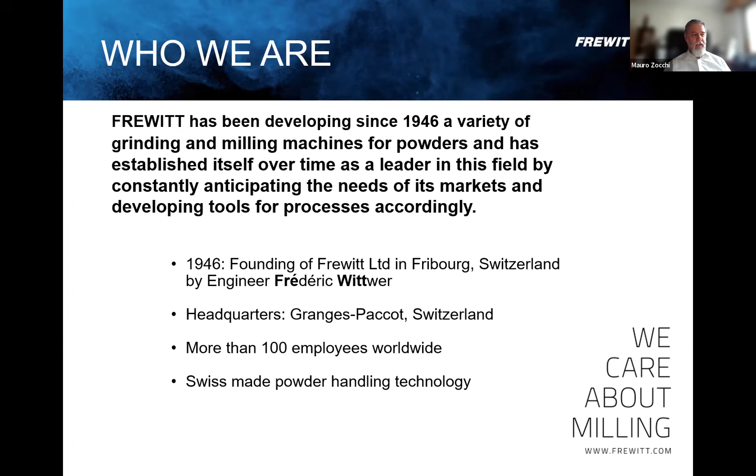We are located in Switzerland in the central part, in a bilingual zone where French and German is spoken. Maybe you are more familiar with Geneva and Zurich, talking about Switzerland. We have Zurich in the east, Geneva in the west, and Basel in the north. We are in the middle. I'm coming from the south, from the Italian part of Switzerland, and we are quite a multicultural little company.

We have core values, Frewitt Total Care: mainly protecting the staff of our customers, protecting the environment of everyone, protecting your products, your APIs, and protecting your investment. These are the main core values that we keep in mind while developing our machines for the market.

And I would just want to go through a quick summary of what we have been doing. In '46 was the foundation of the company, starting with oscillating mills. The engineer Wittwer was one of the main pioneers with this milling process, oscillating mills, to which we added already 50 years ago the hammer mills, then developing the cylindrical sieve mills, going to the conical mills in the 90s. End of the 90s, we came out with pressure shock resistant hammer mills, so 10 bar resistance units.

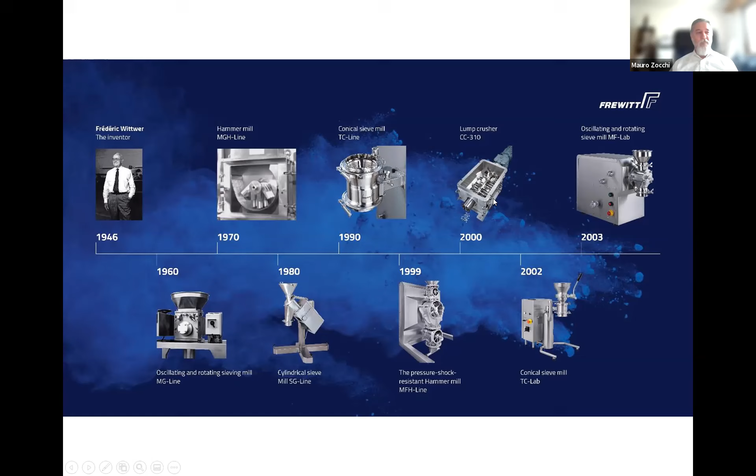We further developed crushers, then laboratory mills, other crushers, some other laboratory mills, to come in 2009 with a very nice development of 2 milling processes combined together, crushing and milling, mainly to give a solution to an existing problem of products solidifying in big blocks, metformin being a good example. So we developed this machine enabling you to throw in the big blocks and go in one go to micronized, free flowing powder. Cylindrical sieve mills of new design, new generation of oscillating mills.

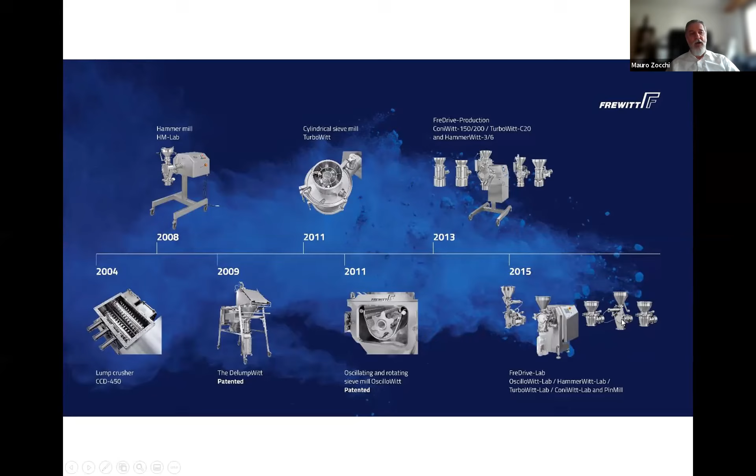And then 10 years ago, we came out with the FreDrive-Production and FreDrive-Lab, 2 platforms on which we can interchange several milling processes, up to 6 with the lab machine.

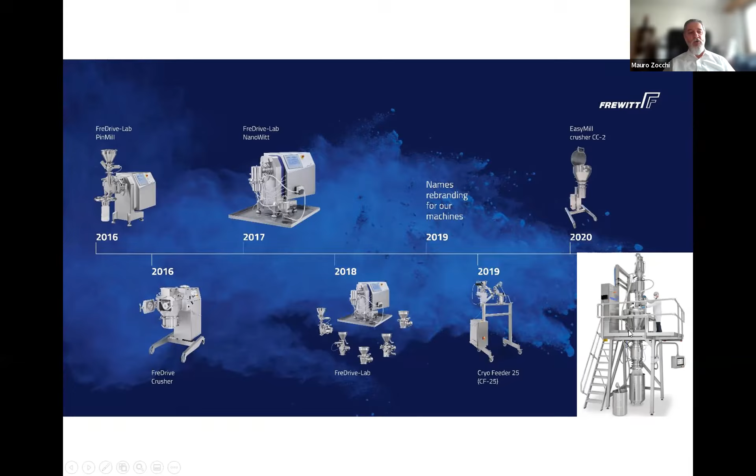A few words just to fine tune. We call fine milling all that goes down to a D90 of less than 100 microns, let's say, for which typically we use hammer mills for dry powders. By D90, we mean that 90% of the milled powder is below this target of, in this case, 100 microns.

Pin mills can go much lower than 100 microns, as well as jet mills. They can reach D90s between 5 and 30 microns, that we call really the core of micronization. There are several interpretations of micronization, so we cannot be so precise, but every company looks at micronization in a different way.

But on average, when we are going from a D90 of 5 microns to a D90 of 30 microns, it is generally called micronization. Then we can go lower down to nano size, but this is utilizing typically bead mills, which is a wet liquid process. Today, we'd like to concentrate on micronization.

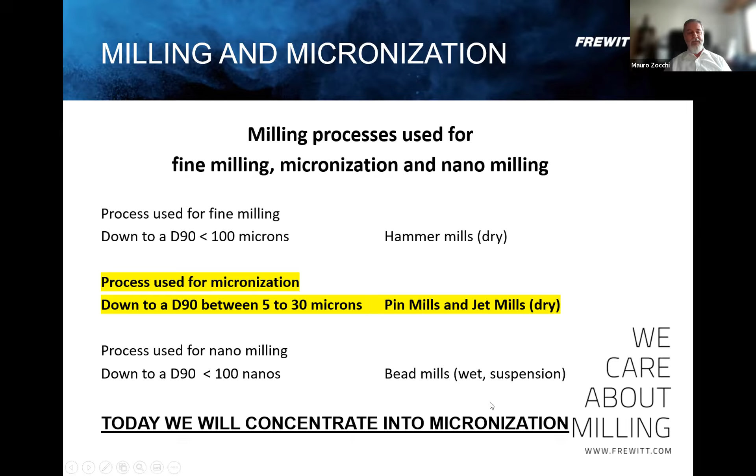Yes, 1 second. Okay.

This is a simple photo giving you a little bit the idea of how a pin mill looks. There is the chamber with a door. The door has typically a stator with the pins, while inside the milling chamber there is a drive, and the dynamic part, the rotor with the pins. The product typically enters here, gets micronized here, and then exits at the bottom of the mill.

There are different designs on the market. I just chose one to give you more or less an idea of how the micronization takes place. The concept is an impact mill. It's not so different than a hammer mill, but it works with the pins: in this case there are 3 lines of pins, and here are 2 lines which are put in between, with a small gap in between, and there is a high speed which is typically higher than hammer mills.

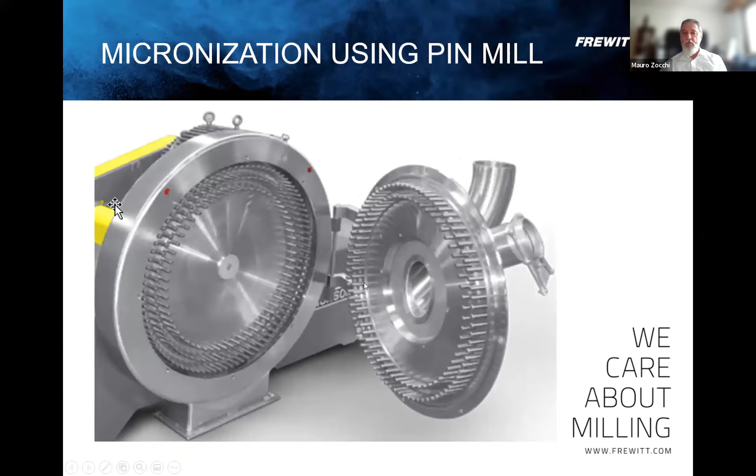I hope the explanation is sufficient on how the pin mill works. If I'm not clear enough, please ask if you have any question about that. I proceed with the...

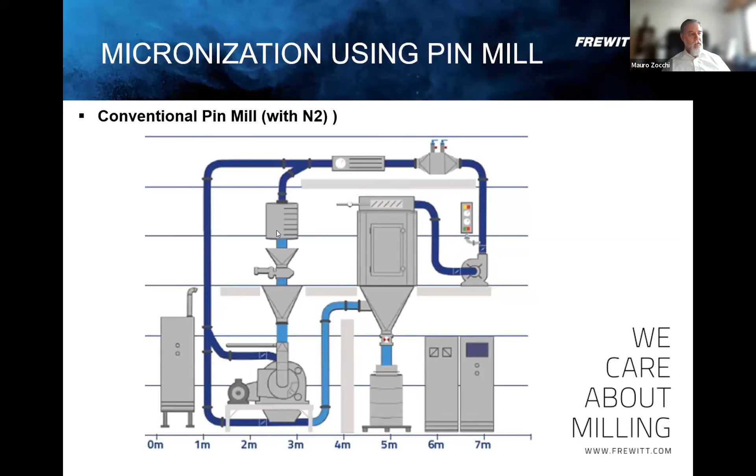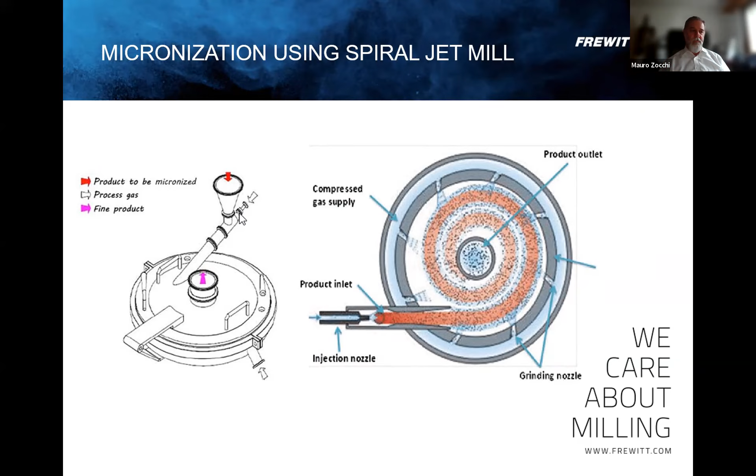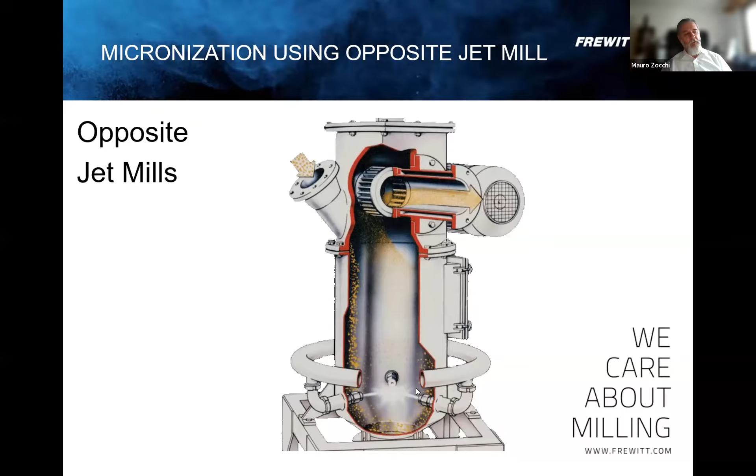And here on top, we have a classifier wheel. That's a mechanical component of this mill, which we don't have in the spiral jet mill. And depending on the speed that we use for the wheel, for this classifier, the powder either goes through when it's fine enough or comes back to be further micronized when it's not fine enough.

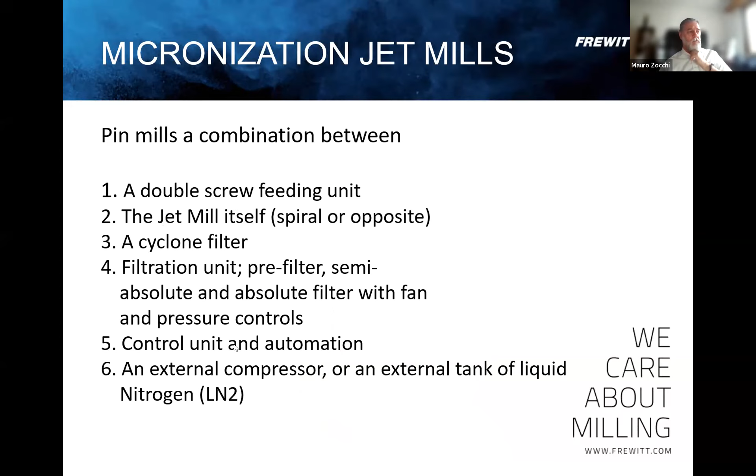Again, as for the pin mills, we have a double screw feeding unit, the jet mill itself, which can be spiral or opposed, cyclone filter, final filtration unit, the controls unit and automation, and for sure an external compressor or an external tank of liquid nitrogen, right? So these are the 2 or 3 main processes that we are utilizing for micronization.

And now we are coming out with a new pin mill, which is the one I'm presenting today. And you might ask yourself, why a new pin mill? Because there are already pin mills on the market, right? The idea was to take a look at the main challenges with which the end user is confronted, and develop a pin mill that solves these challenges. So it solves the problems that are daily presented to the end user, and helps them have a much better mill. So it's not just a new pin mill, we wanted to do something very special.

So these are the main challenges with which the end user is confronted. Of course, he needs to get to a certain particle size distribution. He needs to avoid heating of the product. Heating of the product is a constant challenge using pin mills and spiral jet mills. Throughput as well, it needs to have enough productivity. Explosion risk and costly countermeasures. The finer you go with micronization, with milling, the more explosive the powders are, the higher the explosion danger. So this is quite a big issue in micronization.

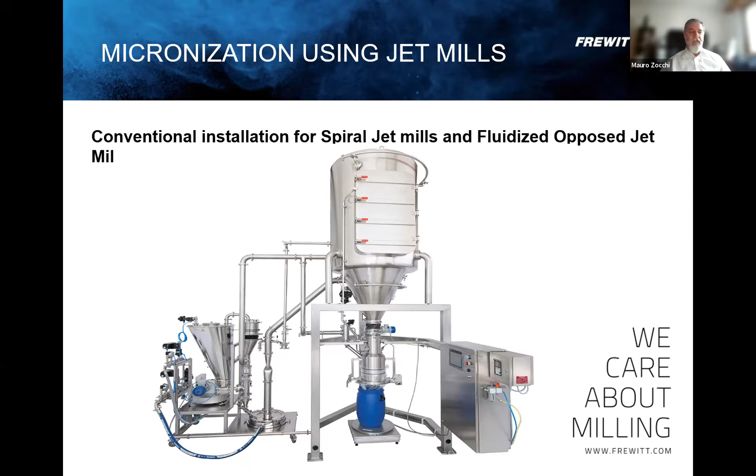Product retention is another problem, and difficult cleaning as well. This is mainly due to the large contact surfaces and large filtering units that are used. The installation footprint as well. You see that the mill is only a tiny part of the whole thing, but then you have a dosing unit, which is not huge for sure, but especially the gas management part, the cyclone filter, where you need to separate the solid from the gas. This is quite important. So this is a large installation for gas management.

Another quite big issue is the operation cost, especially with nitrogen. Nitrogen is used to avoid explosion and also to protect the product, and these are huge amounts of nitrogen, which are quite costly. Another challenge is the noise, because the jets are very noisy, and pin mills as well, running very fast. They are very noisy, up to 120 decibels.

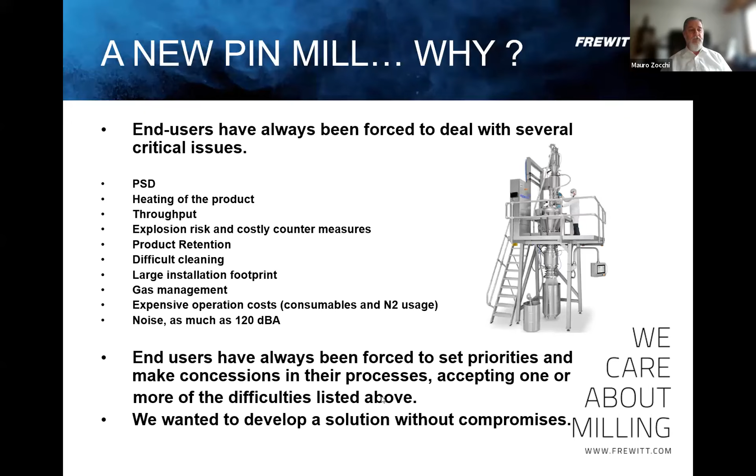So this is what the end user has always been confronted with, and we wanted to develop a solution without these problems, without these compromises. I would like to show you a video now that anticipates a little bit what we have done with this new pin mill.

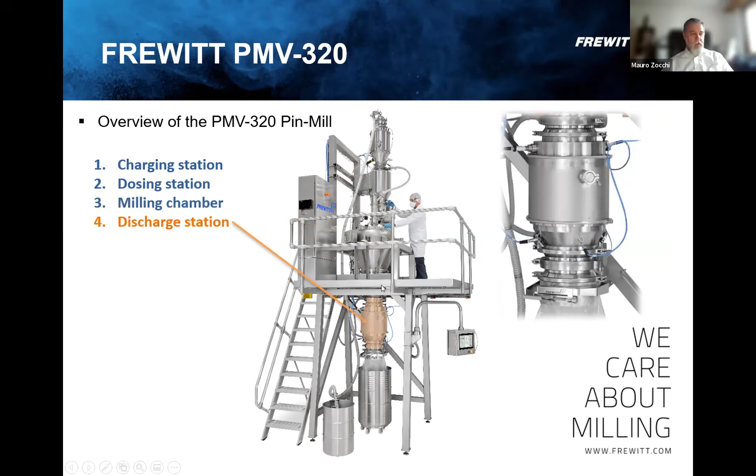PMV 320 stands for pin mill and vacuum, because this machine works under vacuum, and 320 is the size of, let's say, the nominal diameter of the milling chamber. Okay, here we see an overview of the entire installation. We have on top a charging station. We have a dosing station, and we have a milling chamber. Thereafter, we have a discharge station.

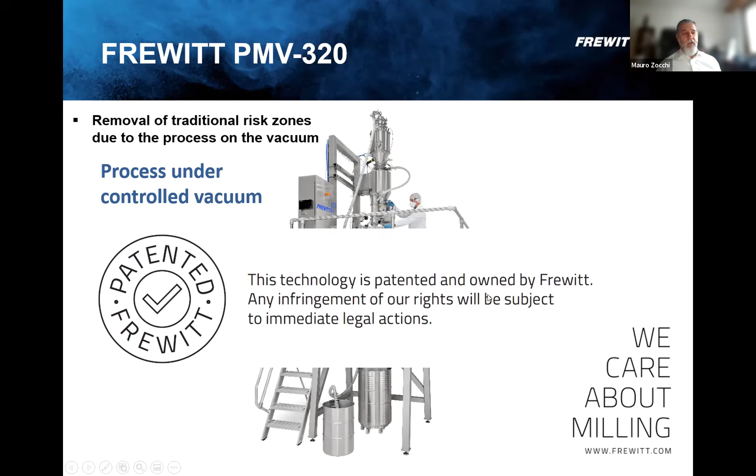The process under controlled vacuum is patented. We received the patent for Europe and United States, and we're waiting for more patents. Not only has the patent for this pin mill under vacuum been received, but also the patent for other mills in our range. Milling under vacuum in general.

We can see here that the whole installation is under vacuum. We have in the vacuum the charging, the dosing, the milling chamber, and the discharge station, which leads to one of the main advantages in this case: the zero risk of explosion. So for explosive products, we do not need any longer to deal with inertization of nitrogen. We do not need to deal any longer with 10 bar resistance, explosion-proof machines, which are very, very solid and heavy, and which are not really what we are looking for, especially in pharmaceutical application, when we need lighter units, also easy to assemble, disassemble, and clean.

Working under vacuum, we also have, I would not say, the noise level of 69 decibel. It's almost not noise. It's a silent level, right? 69 decibel. It's much less than now that I'm speaking. Speaking now, I'm at least on the 70, on the 80 decibel. So the machine is really so silent that, just to make an example, when this machine was presented for the first time, we were a group of persons in the milling chamber, and after 10 minutes we were looking at each other and said, when do we start milling? And they told us no, the machine was already running for the past 10 minutes. It's a very silent system.

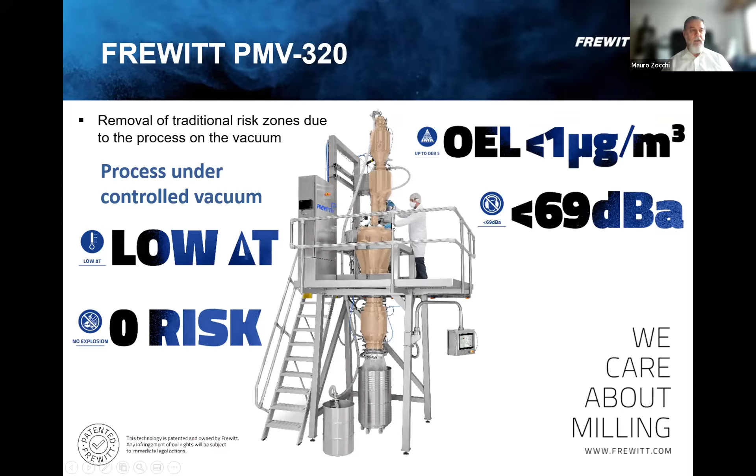At the same time, we are at the high containment level, which is less than 1 microgram per cubic meter. We are in full band OEB 5 because everything is sucked. There is no air inside. We are under vacuum. There is no chance at all for any part per million of particle to go outside of the machine. It's like being in an isolator. In fact, the first step before starting the production is a tightness test of the installation. It's an integrity test. Only after having passed this first step, we can start utilizing the machine.

The machine works under vacuum, which means it works at around 100 millibar. Let's say, imagine we have an explosion. Even if the explosion is not possible, would we have an explosion in any case for some exotic reason, being in 100 millibar and having an explosion which typically increases the pressure tenfold, we go from 100 millibar to 1 bar, which is atmospheric pressure. So there is nothing that can endanger the product and nothing that can endanger the machine.

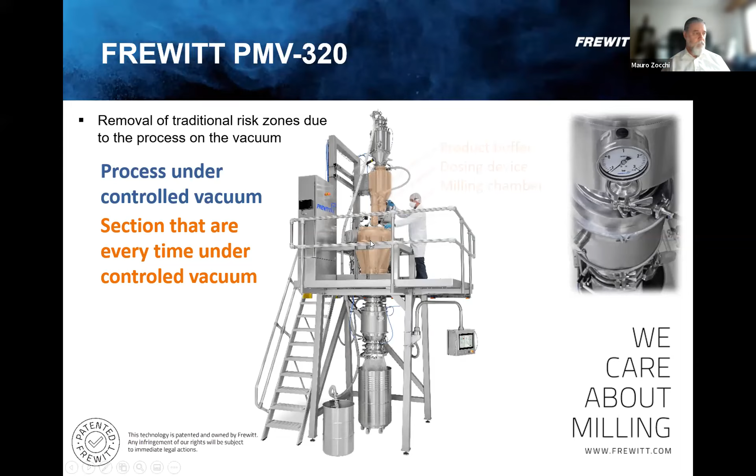So here we have the sections which are always under controlled vacuum, with no exception. This is the buffer, the dosing unit, and the milling chamber. Product buffer, dosing device, and milling chamber. And then we have the section that changes from vacuum to atmospheric pressure. The charging station is one of them, which means that we have the filling of this container with the vacuum conveyor bringing up the powder. And once the powder is ready to be discharged, we go into vacuum mode utilizing some special valves.

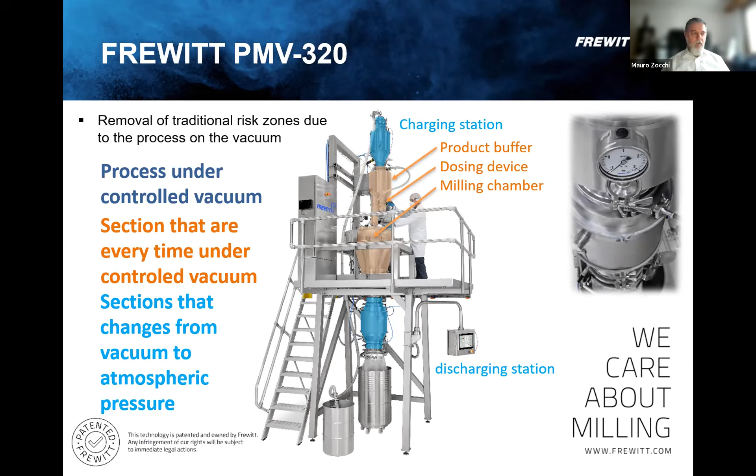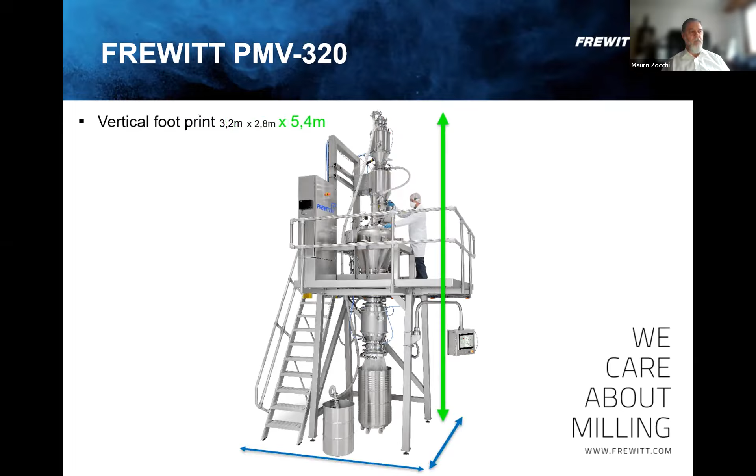The same for the discharge station. When we have enough product to be discharged, then we change from under vacuum to atmospheric pressure, so that the product can easily fall by gravity into the receiving container. We have a vertical footprint. We have a width of 3.2 meters, a depth of 2.8, and a height of 5.4 meters. Here we can see some more details.

The control of this installation comes with an industrial PC, with a touch screen controlling the machine. The control cabinet can be placed under the machine on the catwalk or in the technical room.

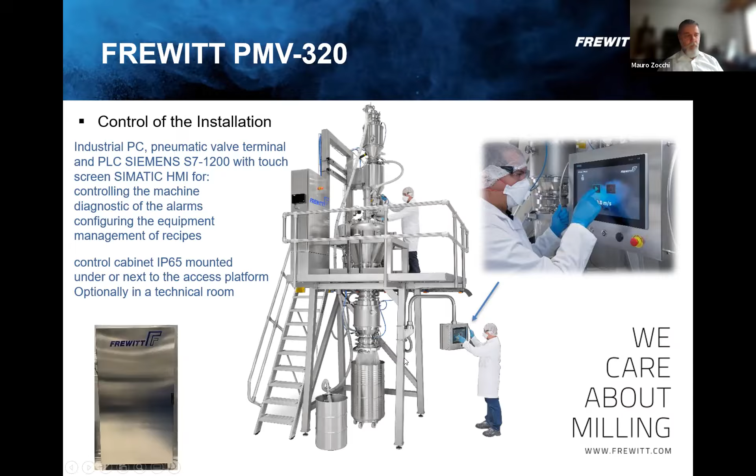We have a set of 3 vacuum pumps which are delivered with the installation, and they are placed in their own skid. It's a skid of about 1 meter depth by 1.4 meter width and 2 meters high, which is to be installed in a separate technical room. And then from the technical room to the installation, we need to have some rigid piping.

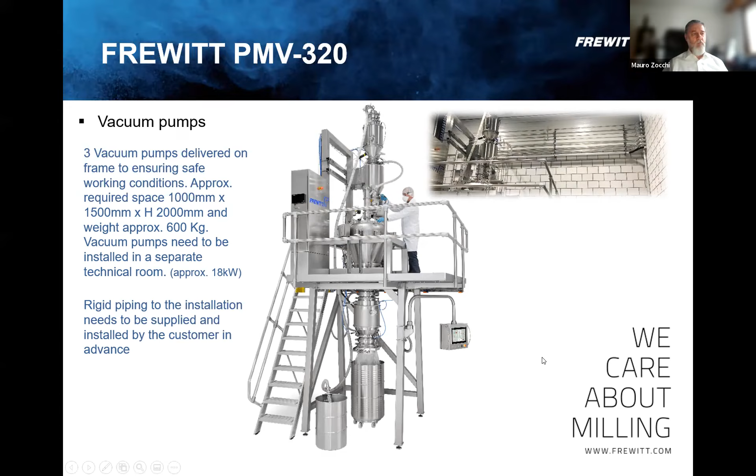We have an integrated conveying system. We can suck with the lance the product freely from a drum, like this. Or we can also aspirate the product from a bag discharging station, or a bag discharging station with some mills beneath to do some pre-crushing, like with a cylindrical sieve mill, with a conical mill, with a hammer mill.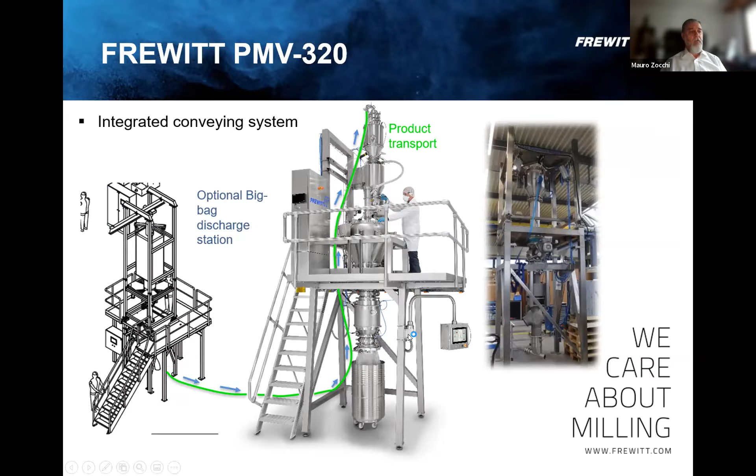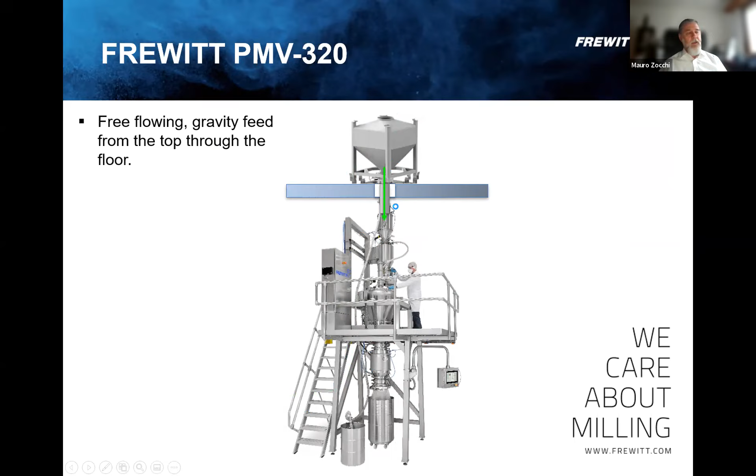We can also convey the product from an IBC discharge station. We can convey it from a big bag discharge station. Or we can work on different floor levels, having an IBC, let's say, on top, and instead of the conveyor, we use gravity feeding.

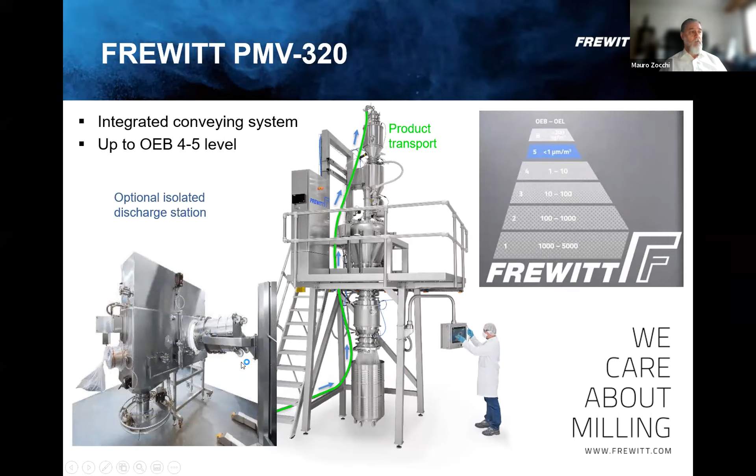If there are containment needs, we can work with, again, the discharge station from an IBC using beta valves. We can work directly connecting to an isolator. Isolated discharge station.

Back to the integrated conveying system. We have a first vacuum chamber. Here we see again in blue the atmospheric pressure. Here we have an integrated filter. Product is ready to be discharged, and this first vacuum chamber changes to under vacuum mode, and we can discharge the product. Dosing unit, milling chamber. And then we can start the next charging, going back to atmospheric pressure.

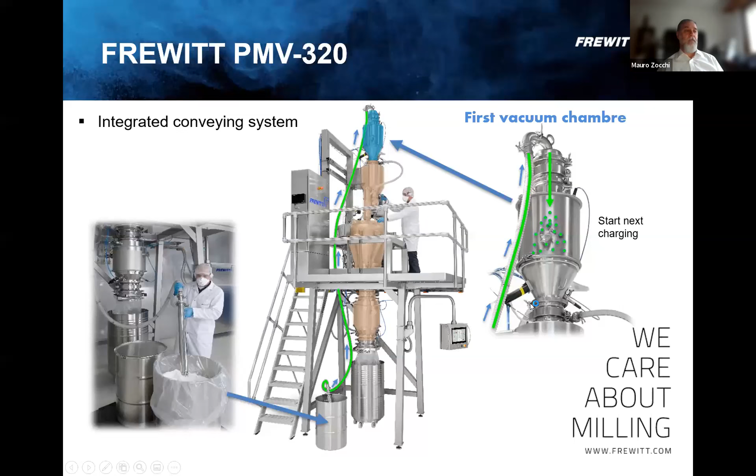Here we have a buffer with the feeding unit and the dosing device of the feeding unit. And here we have the milling chamber with the pin mill. The rotor can reach up to a tip speed of 200 meters per second, depending on the application. The average use of the motor of the rotor is 10 kilowatt, but there is power available up to 43 kilowatt, depending on the torque that we need.

Stator and removable rotor mounted on a fully closed bearing head, protected by air or nitrogen supply of approximately 100 normal liters per minute. This is more or less the only gas that we need for our installation, which is really limited to a very small amount, so extremely small consumption of gas.

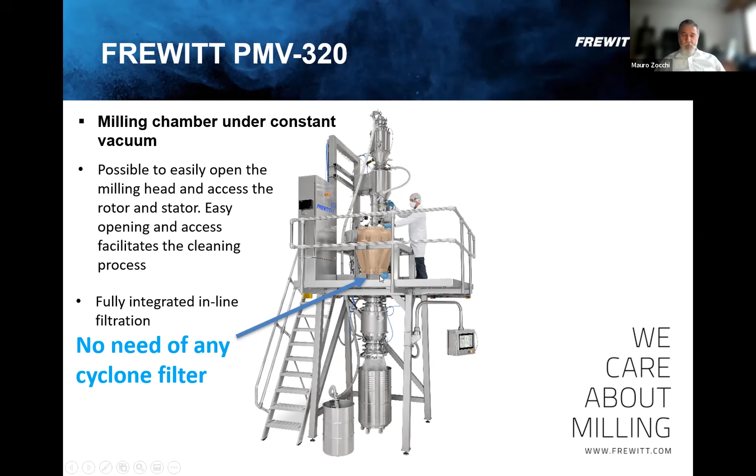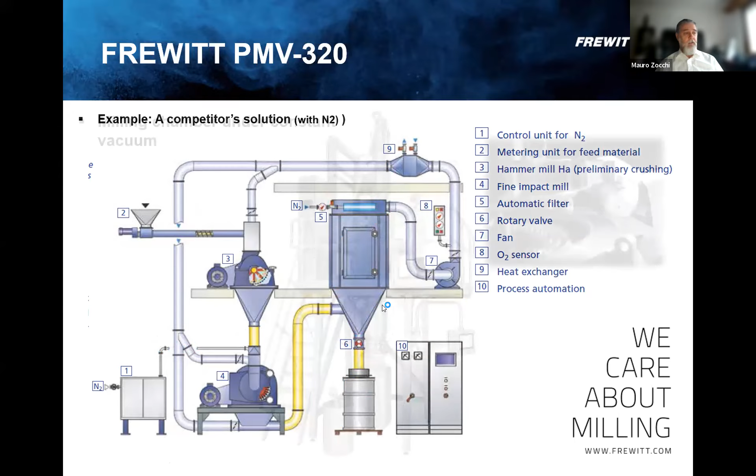And again, we have the filtration integrated in line. With this in mind, you have noticed that we don't have any cyclone filter on the side, because the filtration of this unit is integrated into the machine. Also because there are no large volumes of process gas here. It's only a little bit of gas for protecting the bearing. So if you recall, the cyclone filter part is quite an important volume of the whole installation, which kind of doubles the footprint. And in our case, we don't have this cyclone on the side.

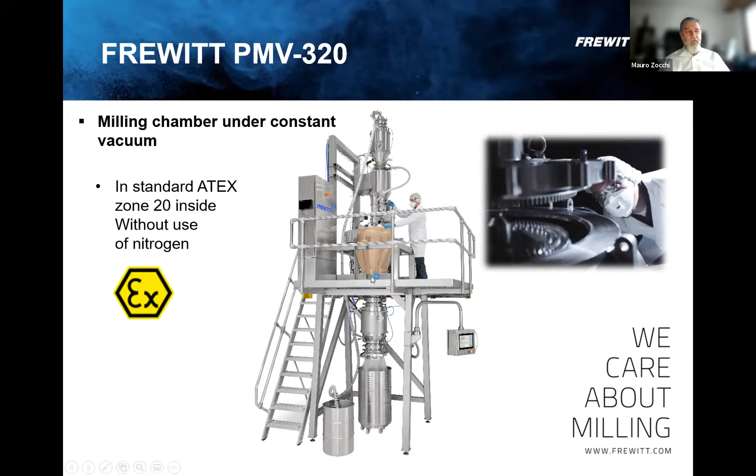So without using any nitrogen, we are in a standard zone 20 inside, so no risk of explosion or a dramatic decrease to the limit risk of explosion. And also in the discharge station, we have an integrated filter. So during the discharge function, the outlet is under ambient atmospheric pressure.

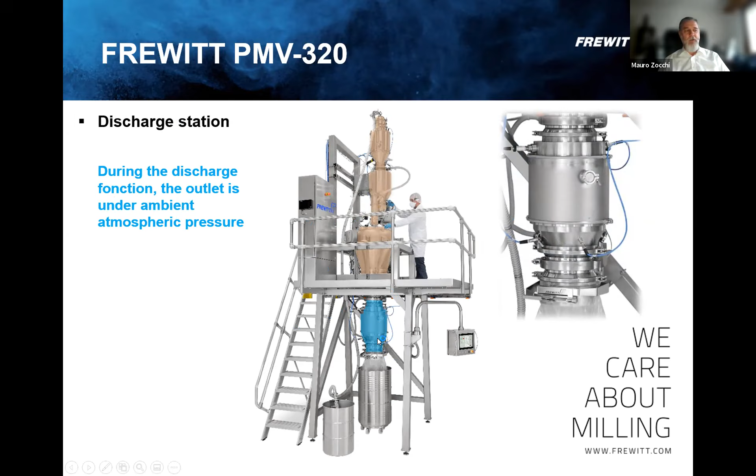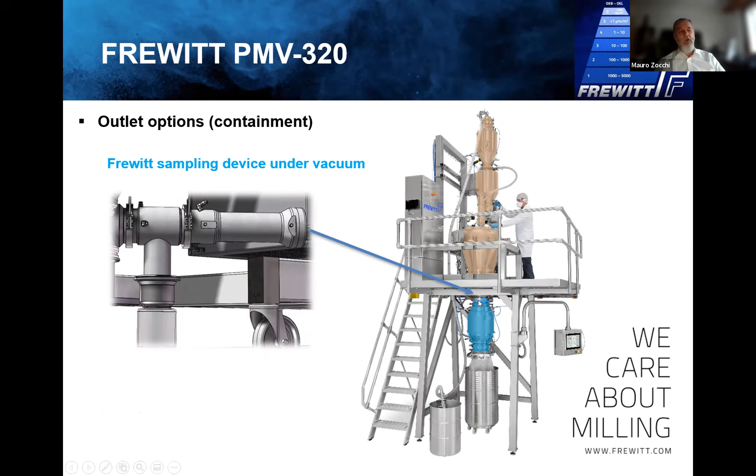As outlet options, we can have a simple drum with its liner. We can have IBCs. We can have bag holding devices, pneumatic or mechanical. Big bag filler station. And we can also use a sampling device, which we have developed internally. We can use the continuous liner system, another own Frewitt device, the ProfiLiner. It's one of our modules, together with the sampling device and the bag holding devices. This can guarantee an OEB level of 4 up to 5, depending on how the operator is working.

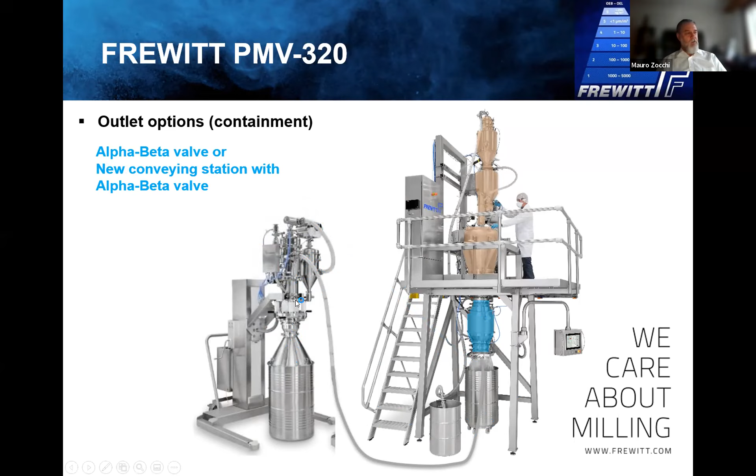We could also include a dosing station, and with this discharge at ambient temperature, ambient pressure, we can be quite precise in the weighing of the final packing. We can go with another pneumatic transfer into the discharge with alpha beta valves, if we are talking about containment, or go to some isolators or contained pack-off in this system.

We can also, as an option, offer, in any case, the complete inertization of the mill with nitrogen and with oxygen control. This is not really necessary, but as every customer has his own internal regulation, in some cases we are asked for this as well.

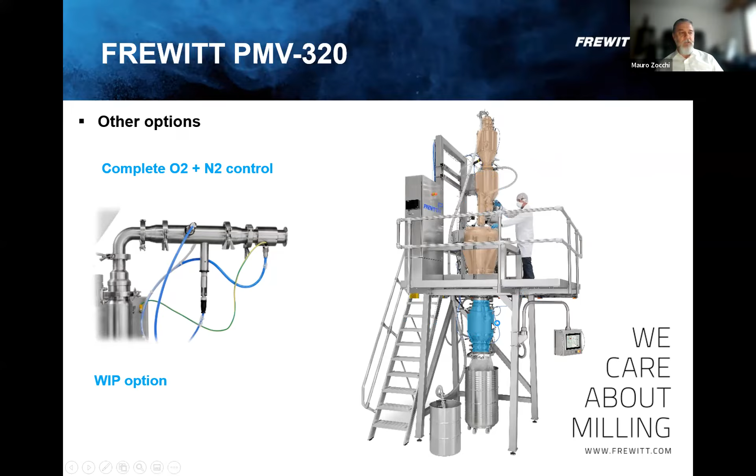Another option is the WIP, washing in place option, with nozzles throughout the machine, and we have a vertical top-down system which is quite easily washed.

So coming to an end of the presentation, we can say that we had in mind to develop a pin mill, but not a conventional pin mill as many which are out there, but something special, something that gives you a solution to existing problems of similar mills.

So regarding the particle size distribution, we can offer a superior fineness, also due to the higher tip speed that this machine can reach, up to 250 meters per second. It's a particle size distribution that can compete with a spiral jet mill or opposed jet mill.

We can achieve a stable temperature due to the absence of air inside, and also to the cooling of the milling chamber, as explained. Typically, we have 8 to maximum 15 Celsius delta increase in temperature, so that the product remains protected. The machine can give very high throughput, up to 1 ton per hour.

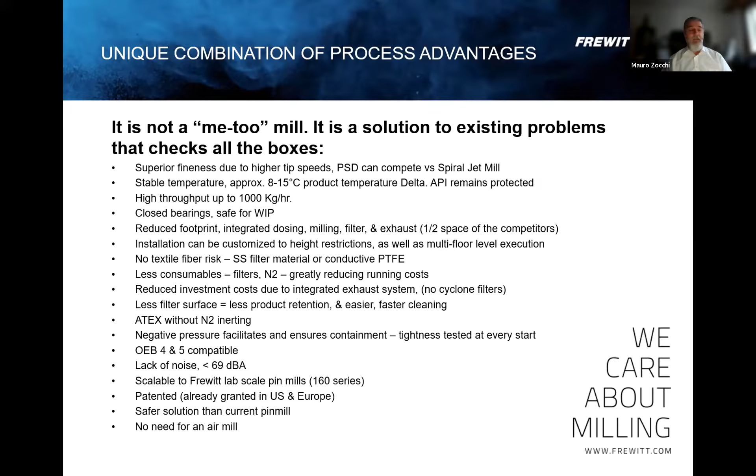Patented, we said already, and it's a much safer solution than current pin mills as well. And at the end, it can substitute the air mills, the jet mills as well. So again, just to add some advantages: the washing in place, cleaning in place from top down, the 50% less footprint, minimum filtering surface, easy cleaning and maintenance, minimum nitrogen consumption.

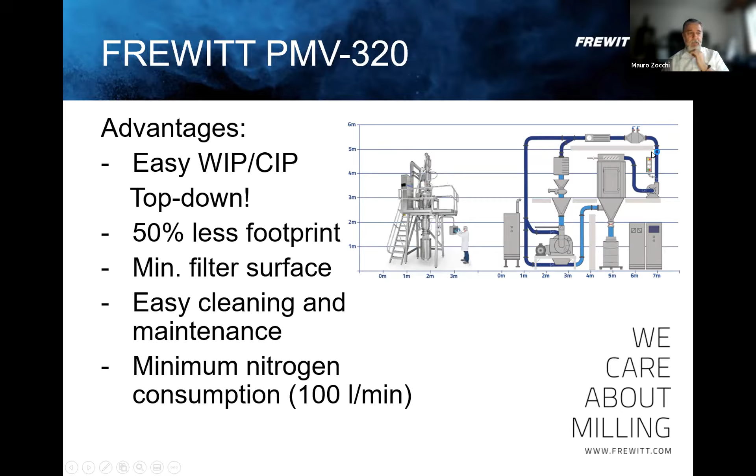And here we see schematically more or less the size of this mill, which goes from 0 to 3.5 meters more or less, and 5 meters in height, and the size of the conventional pin mill, which goes up to 7 meters and up to more than 5 meters.

Oh, what is that? Okay.

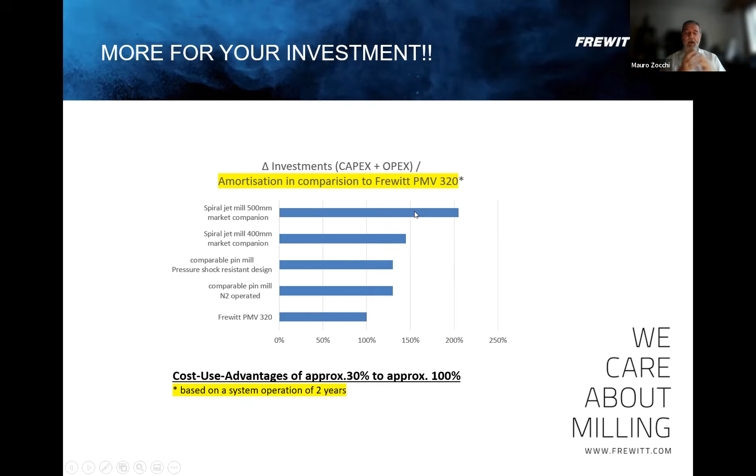And then we have also made a comparison with a spiral jet mill, 400 millimeters. 500 millimeters would be more suited to the size of the pin mill, on a 2 years operation, comparing, of course, the capital investment and the cost of operations, which can go up to double the cost of our pin mill. This is also mainly due to the incredibly high amount of compressed gas that is used, right?

The consumption in our PMV 320 is limited to 9 normal cubic meters per hour, compared to a similar mill on the market, which has 417 normal cubic meters per hour. So you see that there is a huge gap in consumption of process gas, and when we are talking about nitrogen, which is mainly used against explosion for these fine particles, we have a cost of 0.46 Swiss francs per normal cubic meter.

So with 1,000 hours of milling, it can go up to almost 200,000 Swiss francs. And the cost saving, let's say from 4,000 to 191, we have a cost saving of 187,000 Swiss francs. Sorry for the small commercial invasion, but just to give you an idea of the saving potential and the quick return on investment in using this kind of mill.